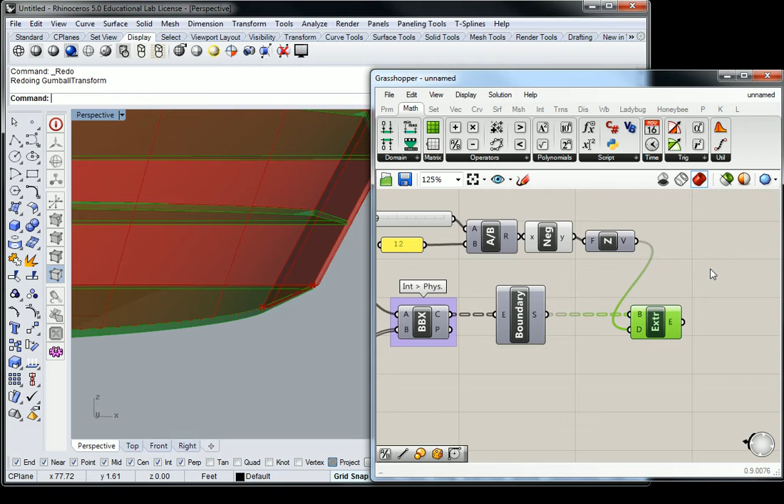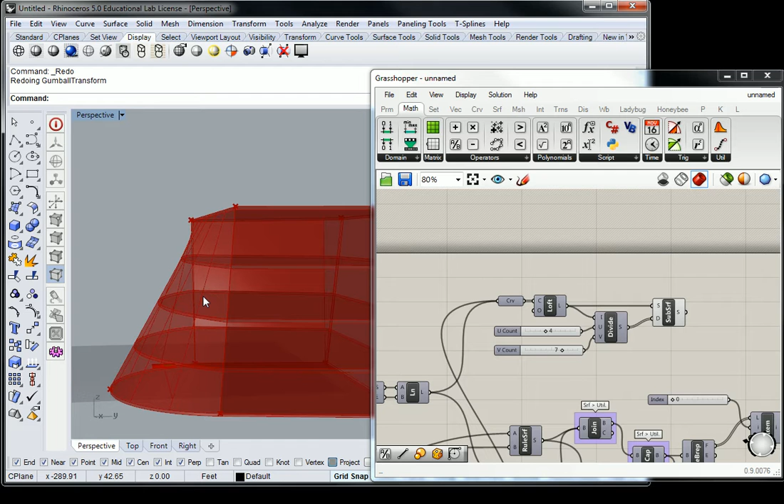All right, so guys, I want to move right along and just continue sort of on the same track. What we created is the subdivision of the surface panels, basically. So if you're going to show the panels with a little bit of a gap or some kind of thing that's going to actually show that the glazing is not just one surface, because what's going to happen here is

if you render it out like this and you haven't created a tiny little gap, like if you haven't reparametrized it to make it slightly smaller than the panel itself, and I'm talking like scale it down by a factor of like 0.995, then you're not going to be able to see that the glazing has a break. It's just going to render as one solid surface. So keep that in mind. I'm not going to do that right now, just keep that in mind.

However, I do want to talk to you about a couple of ways of starting to develop the geometry that you're going to use for your louvers, and that's going to be part of your requirements. When I showed you this right here, I am going to require a pipe-based louver system. It's going to be simple, it's going to be pipes, and I'll give you some dimensional requirements for that, but we'll talk about that in a moment.

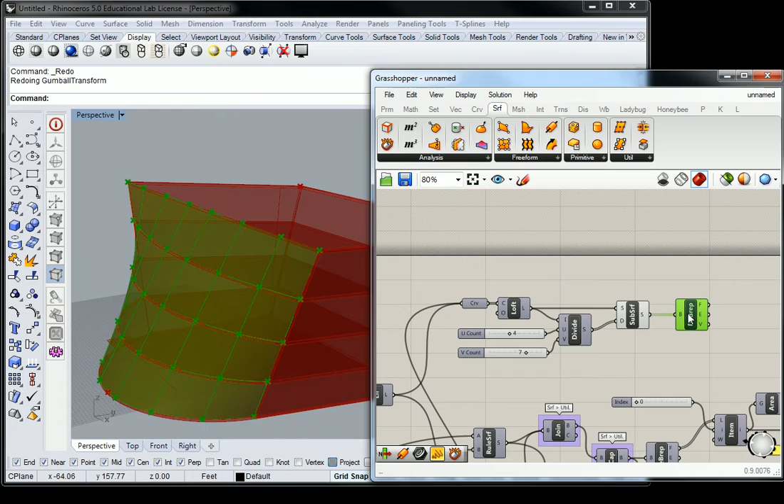But some of the ways that you're going to begin to approach that, okay? And I'm telling you, this is a beginning. It's not the end. I'm just going to give you some hints to get started. You need to deconstruct this subdivided surface, obviously, right? We know that we use that for a million other things. So you're going to deconstruct something like this. Okay? So these points are all going to be coincided with the slab elevation.

And from that, let me go down here. From that, you can do a couple of things. You can isolate some of the edges. You can subdivide the surface and just grab particular faces if you wanted to. Only certain parts of the building are going to have shade, something like that.

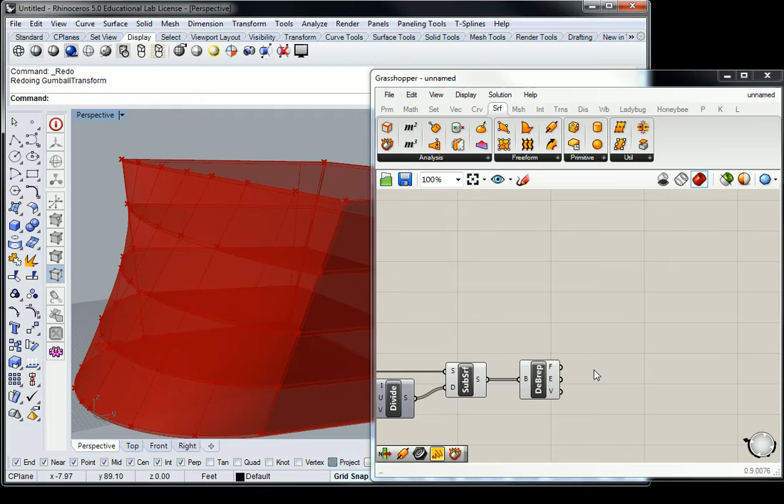But the more important thing here is that you have to pick whether or not you're going to use a normal or a world axis. And here's why. And you don't have to follow along right now and actually do this. I just want you to see it so that you know what the difference is. If I am going to create, say, just a surface, right, that kind of extends outward. I'm using that as just a placeholder right now, right?

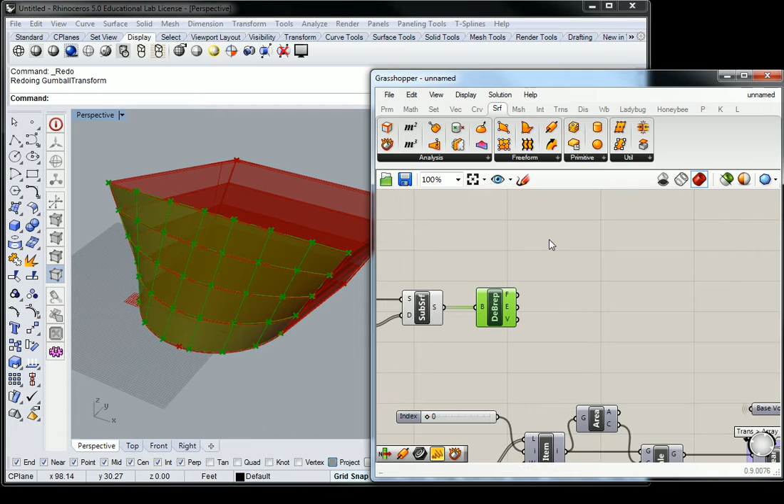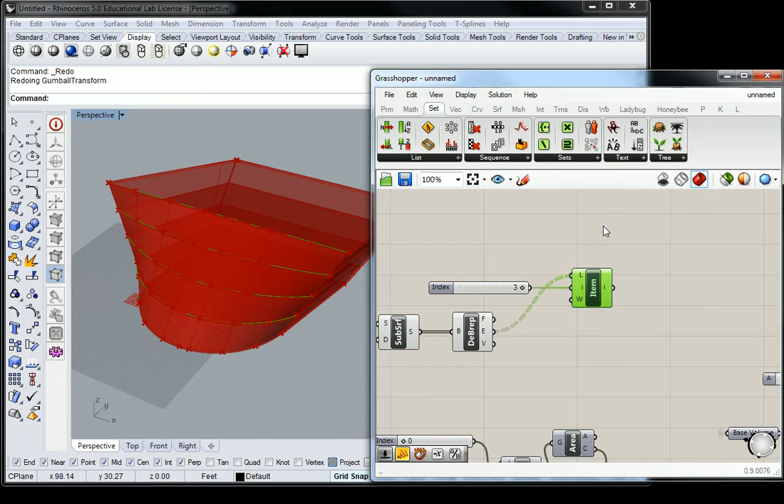I need to grab the edges that will generate that louver, right? So one louver at the top of each of my panels is going to go outward. So 0 to, I don't know, what are these, quadrilateral? Yeah, we're going to go 0 to 3. So that one's a vertical edge. I'll change it to, that's the bottom side top, okay? So I can grab an edge like this, and I can go through the process of actually extruding it.

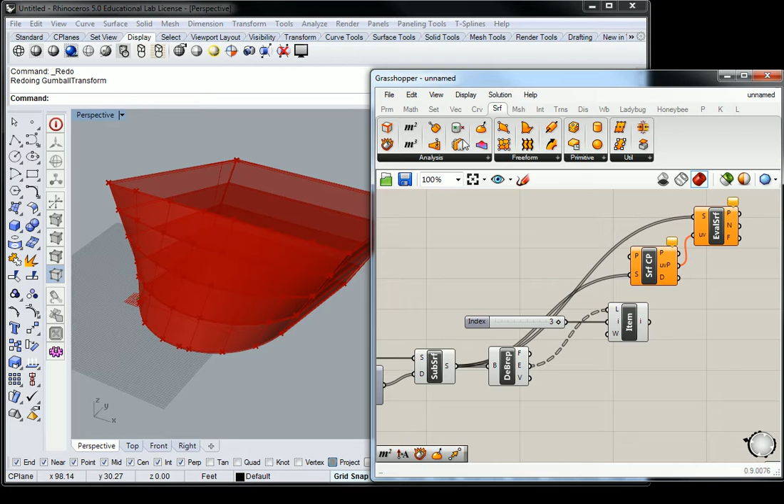If I wanted to get my surface normal, I can do it using the usual method, surface closest point, evaluate surface, and I can say this and that, and find the centroid, and use that. Okay, so I've got all these individual surfaces here with individual normals. I have an equivalent, so 28 normals. I have 28 surfaces. And so if I wanted to extrude them, the geometry would be the surfaces, and then I have normals that are going to need to be amplified.

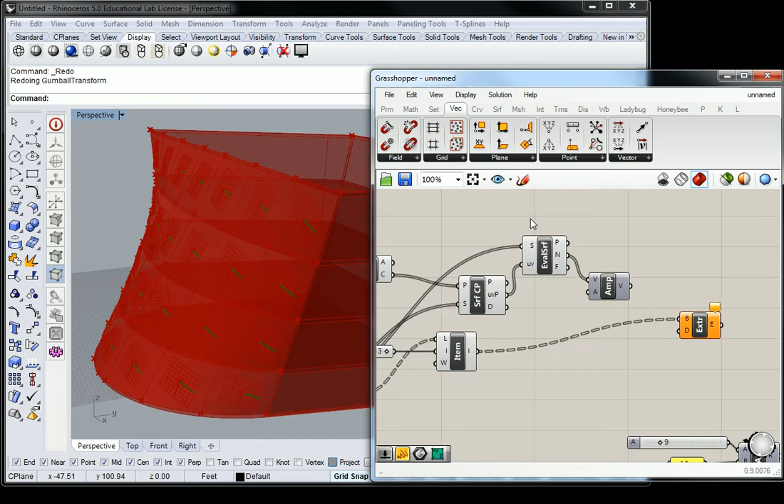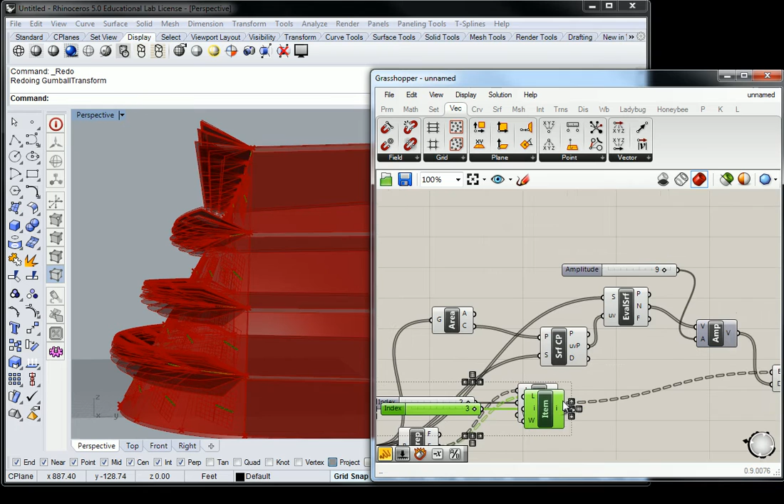I'm going to go rather large here, so I'll say 0 to 10 feet, just for example. So you're going to run into something like this. Oh, I only need one of these, actually. Hang on. Or, no, they just need to be grafted, actually. Graft. There you go. So what you're going to run into is that each of these panels is going to extrude in a slightly different angle. And that's because obviously you created a warped surface, so every single one of those normals is facing a different direction. So you need to be aware of that.

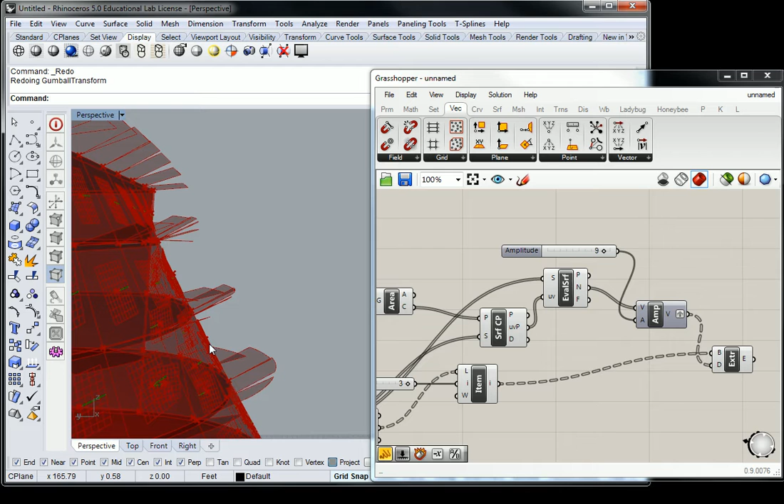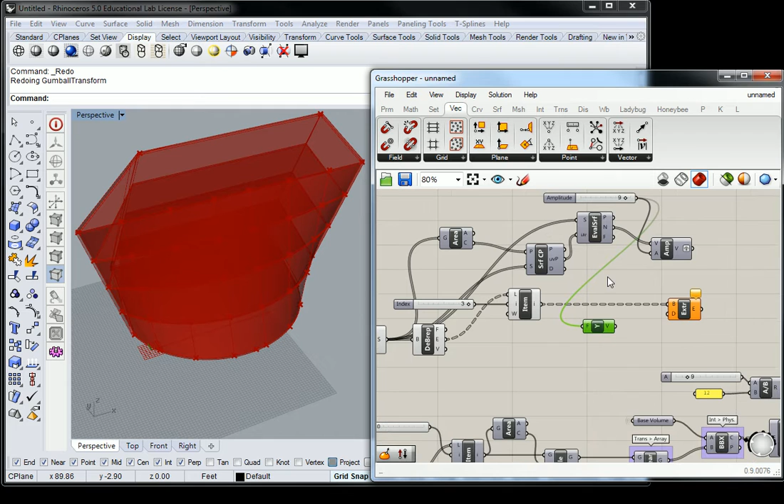If you don't want to use the normals, let me just disconnect this actually. And if you wanted to extrude them all in the world y-axis or something like that, that's probably going to be more efficient for you because you pick a certain direction and you make it happen. So I'm going to use the world Y. I'll plug that same 9 feet in. It might have to be a negative. Yeah, it's going the wrong way. So let me change this to a negative.

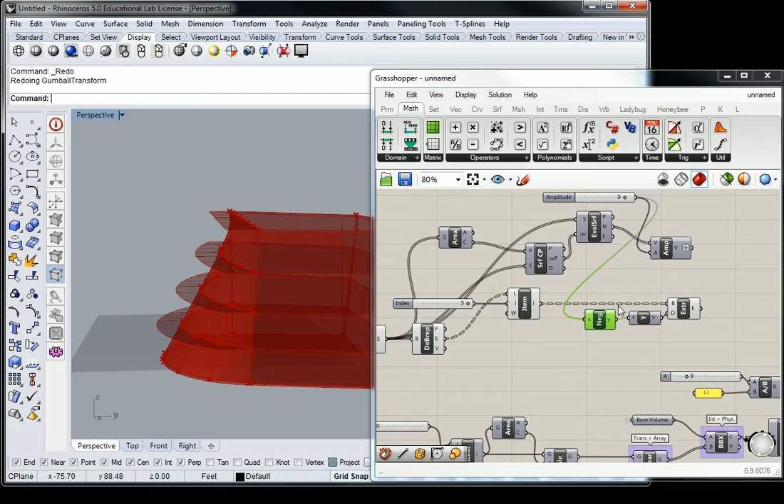There you go. Okay, so you can see that this is obviously going to be a much cleaner approach to the actual extrusion of that sort of geometry. Right? Maybe, possibly. So I want you to be thinking about what's going to serve you best. If you need it to extrude in a different direction, you can draw a line and create an axis off of it and then use that to extrude.

Ying, you look scared.

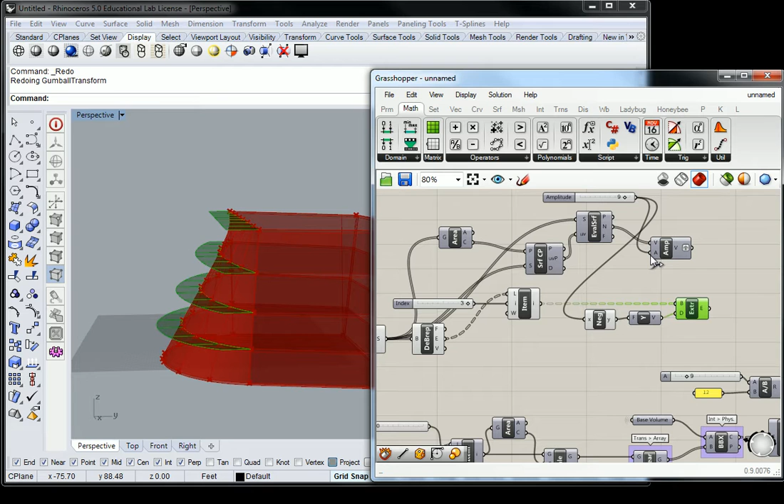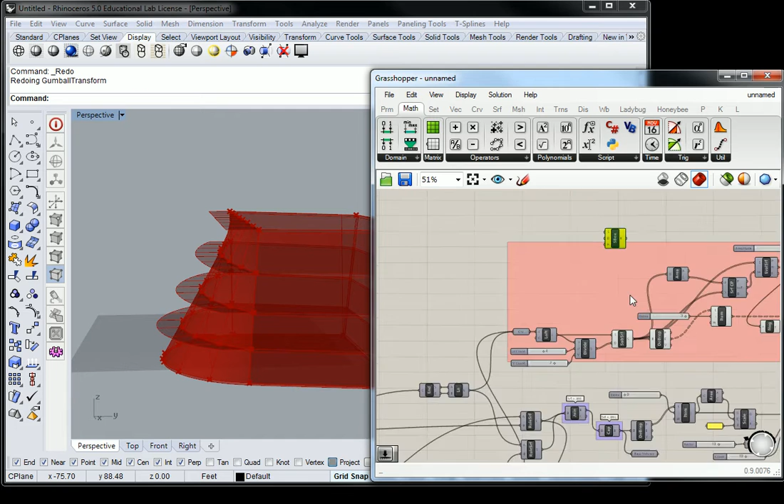All right. So there's one more thing that I want to offer up as a super, super powerful tool. Surface Box. So all of this stuff right now is just kind of playing around, so you kind of know what to do. Let me give that a cool color. There you go. So Surface Box is going to be super awesome for you to be able to do stuff like this. And it is because Surface Box basically just needs your subdivided surface and a domain. So it needs the base surface, it needs the domain, which is essentially going to be the same thing. So surface and domain. And then you tell it how high it's got to go.

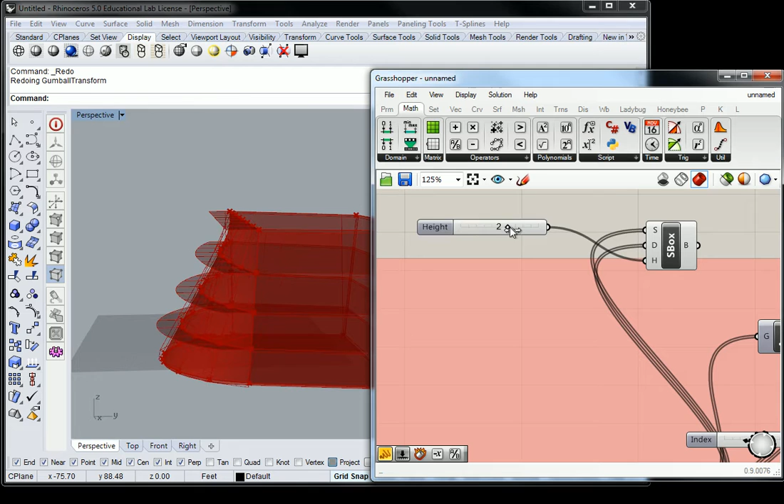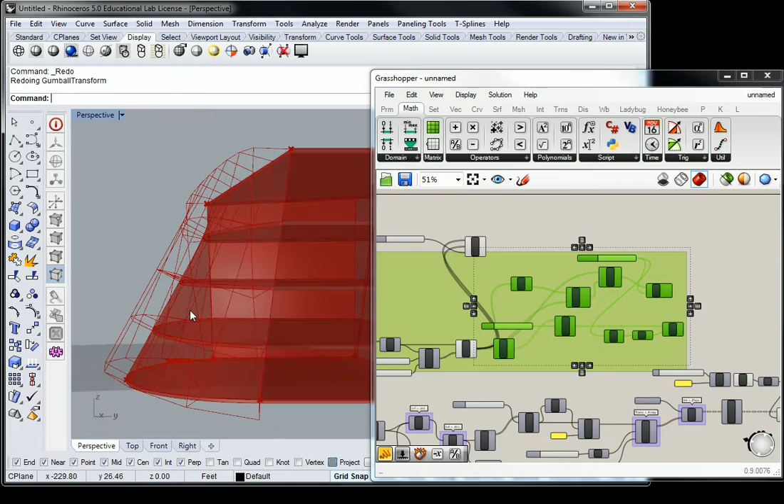So I'm going to say -10 to 10. I don't know which direction it's going right now. Let's see. There we go. Outward. Turn that off. So this one, it depends on what kind of surface you're using it on whether or not this is going to work for you the way you want it to. But basically, it's going to kind of warp everything outward off of the surface itself. See that?

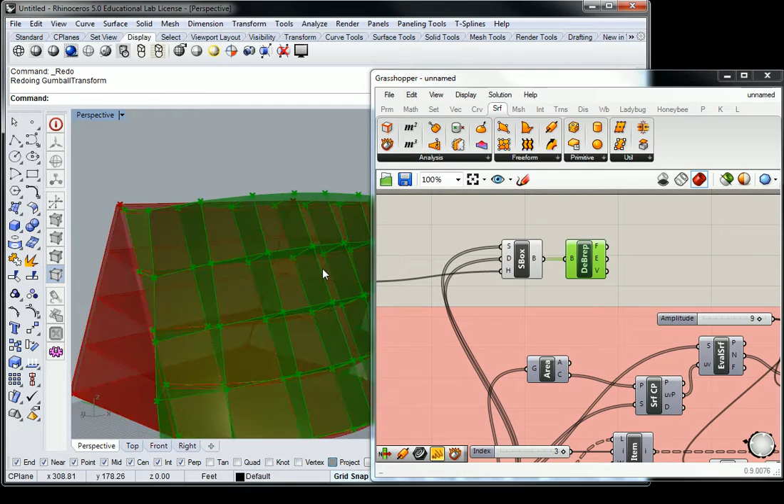But the cool thing about that is that you can actually isolate it. So I can deconstruct it. So I'll go to Surface Analysis, Deconstruct, plug that in, and it creates surfaces off of it that I can use as actual geometry. All right, so yeah. There are some parts of that that are going to be useful, but other parts are not.

Okay? So I think your best friend for all of this is going to be these components right here, your divide domain and subdivide surface, because you're going to be breaking down a lot of geometry. Oh, and list item. List item is going to be a big one. All right, so are you ready to discuss the actual final deliverables? Yes. Any questions about this right now?

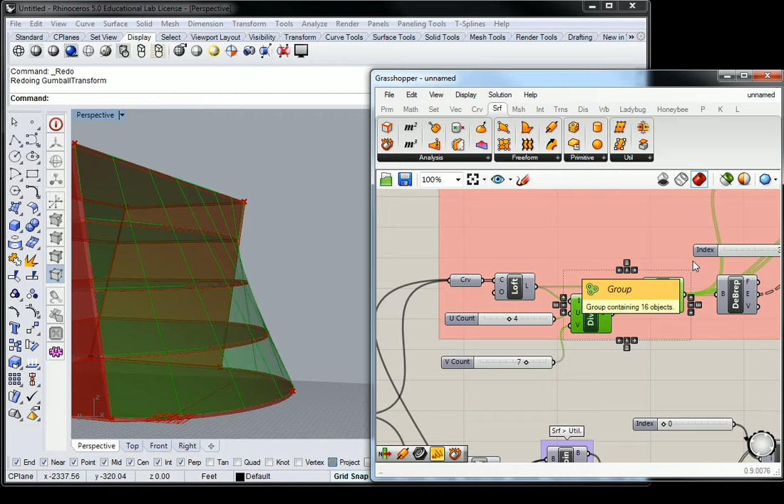Can I have the file? Huh? Can I have the file? You should have developed your own file here. But I mean, after that you add. Oh, this stuff? Sure, yeah, I don't care about this.